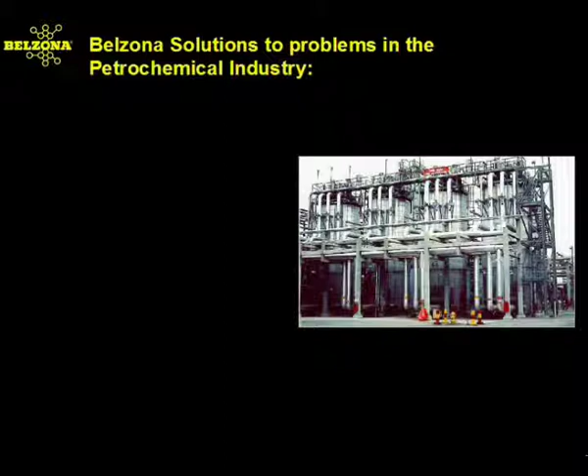Maintenance personnel and project planners must continually deal with preventative maintenance measures, spend capital and energy in the design of equipment, and generally preoccupy themselves with many of the problems which are endemic to most chemical facilities. Some of these problems are stress corrosion cracking, chemical attack, under-insulation corrosion, abrasion, crevice corrosion, galvanic corrosion, cavitation, and microbiological corrosion. Belzona's solutions are used throughout the world to solve and prevent many of these problems in a variety of ways.

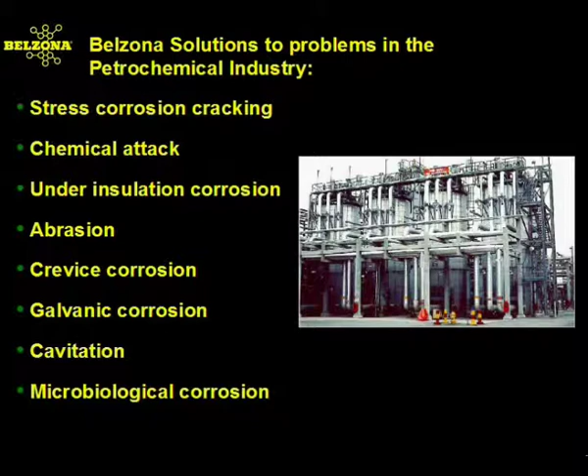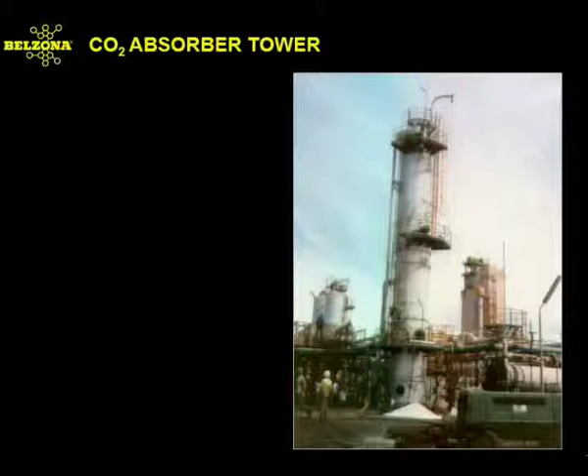Take for instance absorber towers. These units are found the world over to remove unwanted substances such as carbon dioxide, hydrogen sulfide, and sulfur dioxide from a process stream which would otherwise contaminate or inhibit a chemical process.

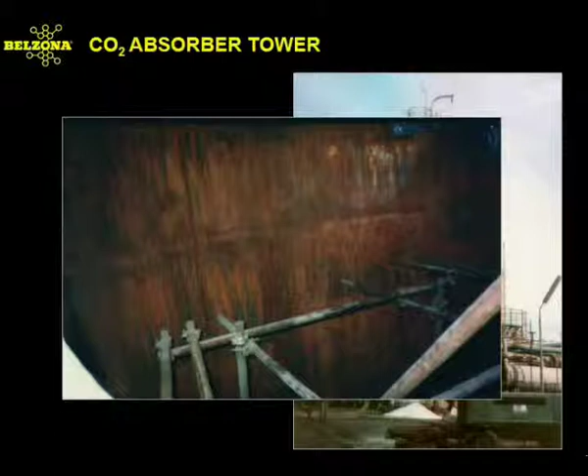Carbon dioxide absorber towers, such as the one pictured above, suffer from stress corrosion cracking. They are also susceptible to chemical degradation as a result of the side production of carbonic acid. Rebuilding and coating the walls of the tower with chemically resistant products will provide the necessary protection against acid or amine solutions.

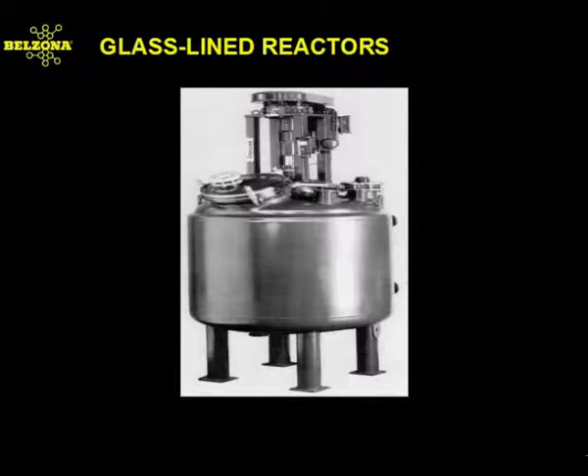A piece of equipment found in most chemical plants are glass-lined reactors or tanks. Most often, these tanks are utilized for their high temperature and good chemical resistance. However, when damaged or abused, they become tedious and expensive to repair and refurbish. Oftentimes, the repair options by the manufacturer are limiting and unrealistic.

For instance, the lid of this vessel had become damaged due to negligence on the part of the maintenance personnel of this pharmaceutical facility. Without any other recourse other than having to purchase another brand new lid, the local Belzona distributor was summoned. Utilizing a forming technique, the underside of the lid was repaired and placed back into service in a short period of time.

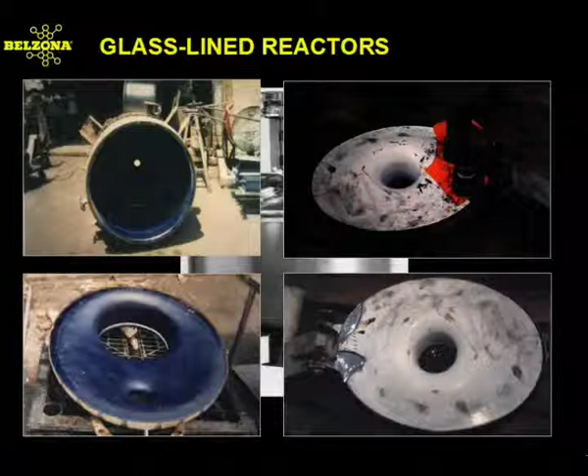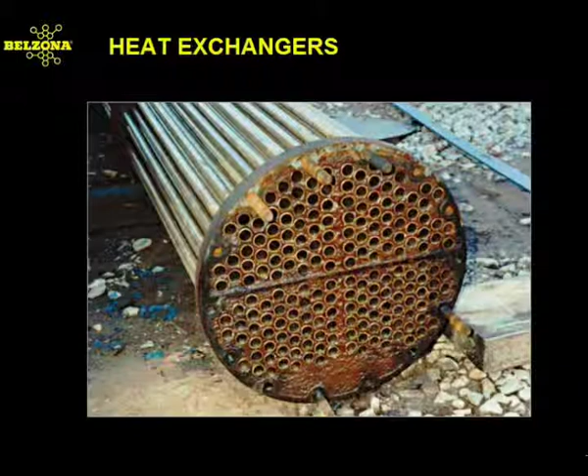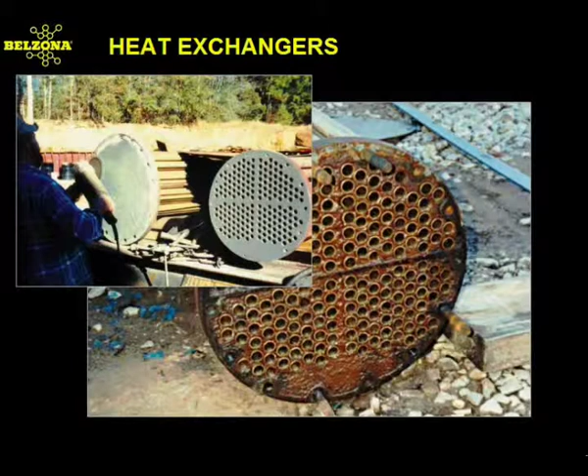Heat exchangers are found throughout any chemical facility, whether they are being used directly in a process, being used as condensers to reclaim water, or being used to cool a process fluid. They suffer from chemical attack, corrosion, and erosion. Belzona offers various systems depending on the chemical solutions, temperature, concentrations, and pressure to help stop and prevent such damage.

Belzona offers step-by-step solutions for the rebuilding and coating of heat exchanger tube sheet surfaces, end covers, floating heads, division bars, and channel heads.

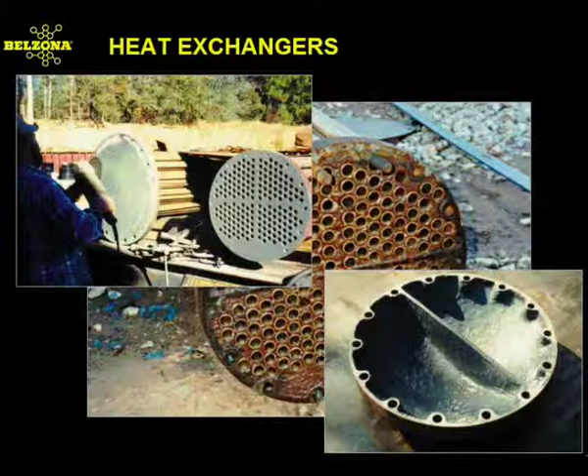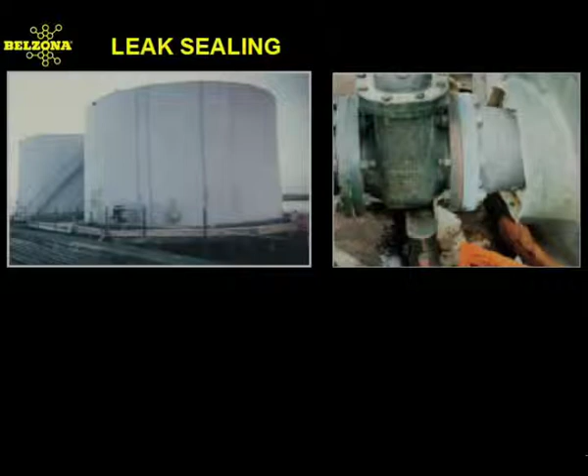Leaks and corrosion on the side of holding vessels, along pipes, near or on flange faces are a problem. Belzona offers various ways to provide emergency as well as long-standing solutions to many of these problems. The products can be used over a wide range of substrates including rubber, concrete, metal, and fiberglass. Their outstanding resistance against chemicals and high temperatures offer cost-effective and time-saving solutions.

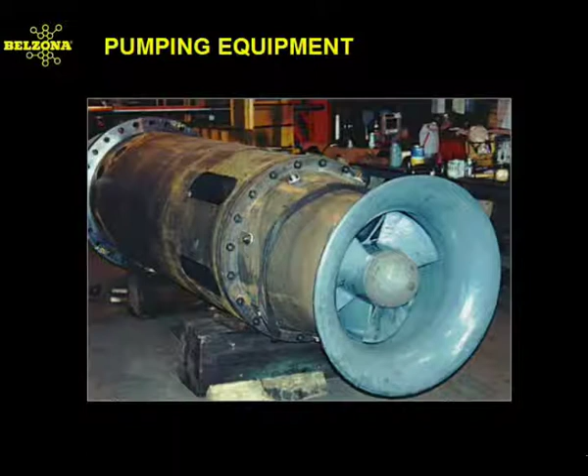Pumps serve a multitude of uses in a chemical facility for distribution, production, processing, and recycling. As can be expected, the various substances which flow through a pump can cause chemical attack and erosion corrosion. Belzona's fluid flow systems can be used for various purposes: to rebuild a worn wear ring seat, a cutwater, or the cone of a vacuum pump.

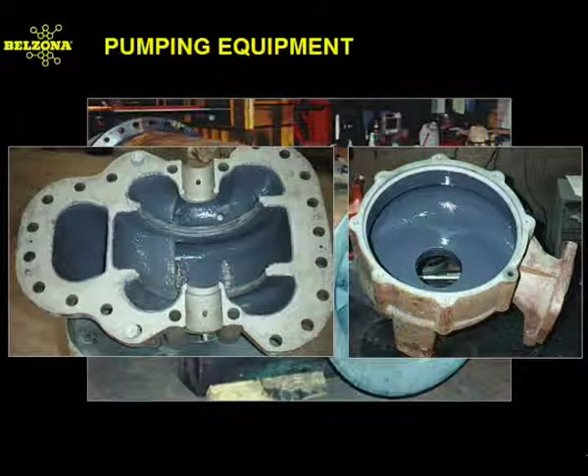They can also be used to coat impellers, rotors, end covers, and casings. The product's high chemical, erosion, and corrosion resistance provide versatile solutions to many recurring problems.

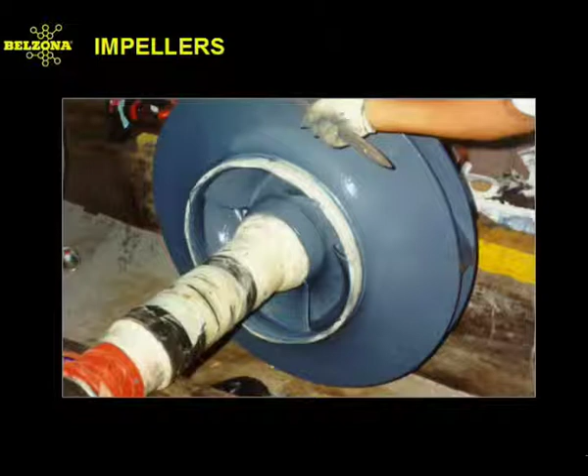Impellers are also prone to erosion corrosion and chemical attack. These impellers used in main circulating water pumps suffered from cavitation. Belzona offers rebuilding grade products to compensate for the erosion due to cavitation, thereby providing the needed protection as well as a means to slow down such damage.

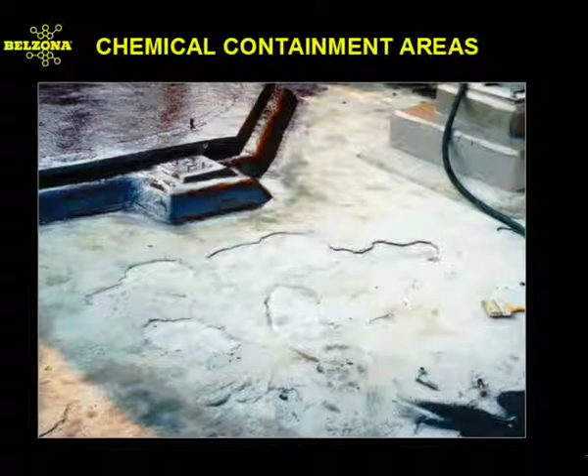Containment areas present a special problem. Ever-increasing concerns to make process facilities compliant with environmental regulations has led to greater efforts to comply with such legislation. Although a great building product due to its porosity and chemical makeup, concrete is easily attacked by various chemical solutions. The use of chemically resistant rebuilding and coating products increased their functionality remarkably.

Belzona offers tough, non-porous products resistant to a wide range of chemicals, such as high concentrations of inorganic acids, all types of hydrocarbons, caustic substances, organic acids, and alcohols.

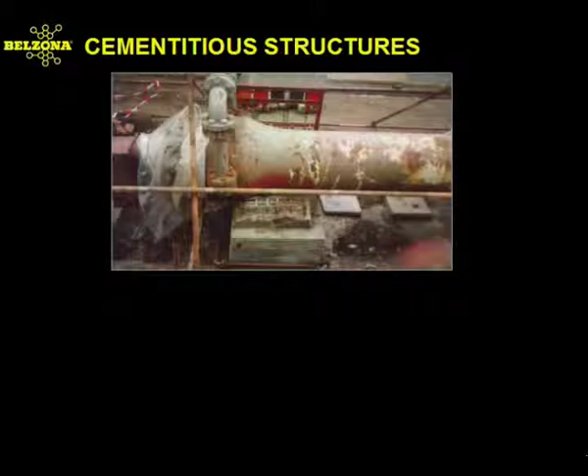Whether it be a support stand for a pump, circulating agitator arm, or reactor, as in this case, the Belzona 4000 series products can be used to rebuild and repair concrete structures. The product's high durability and resistance to vibration make them ideal to resist high loads of varying degrees of movement.

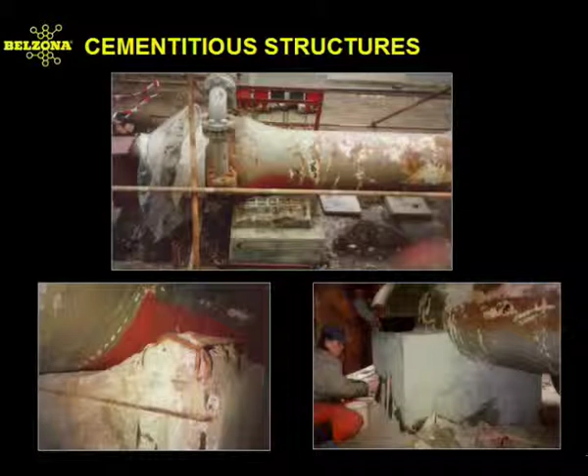As seen in this case, the complete deterioration of the base of this reactor is such that even the rebar is exposed. It is obviously critical to encapsulate the rebar and preserve the integrity of the base. The actual reconstruction of the base itself proved effective, saving the facility valuable downtime.

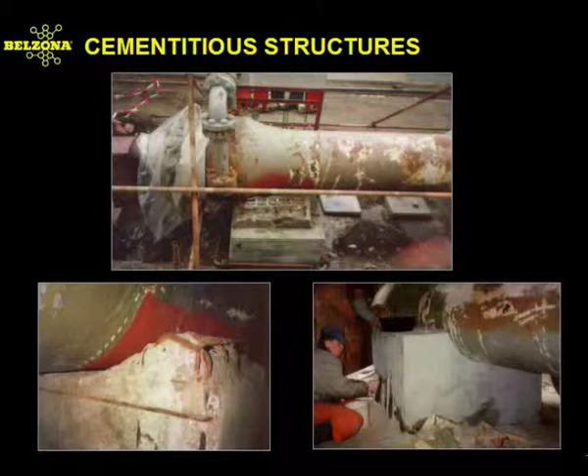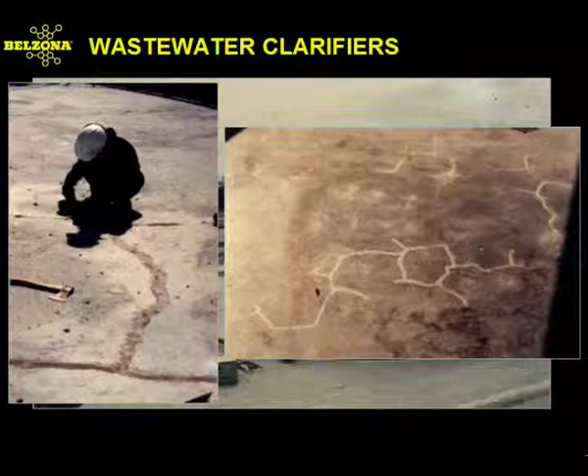The treatment of water used throughout the plant becomes a critical part of a chemical facility's processes. As the water goes through the various stages of purification, it comes in contact with pumping, piping, and equipment used for purification. There is an obvious interest in protecting this equipment to minimize costs and increase effectiveness.

This 100-foot diameter clarifier suffered from several problems. Of utmost importance, besides the obvious chemical problems, were the cracks throughout its base and the use of an inadequate elastomeric compound for the expansion joint. Belzona 2000, 4000, and 5000 series products were used to repair and coat this clarifier, proving once again their versatility.

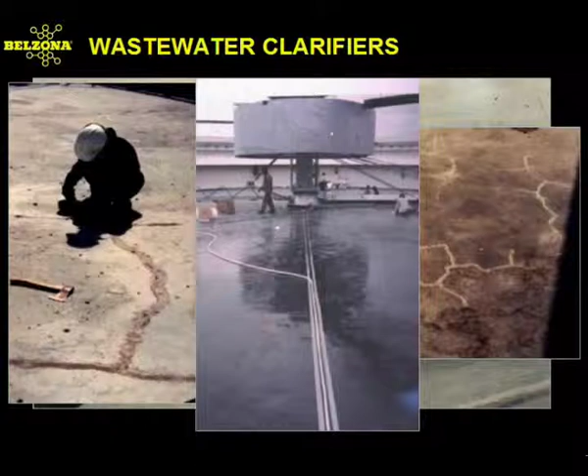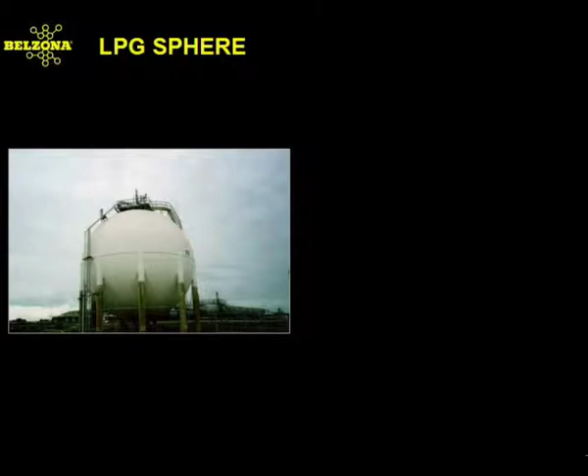A leak in this liquefied petroleum gas holding sphere presents a potentially disastrous hazard. As with most insulated structures, equipment, and piping, the improper protection of insulation can result in corrosion damage, inadequate production rates, and safety concerns. Stress corrosion cracking can result from the use of metal cladding to protect insulation.

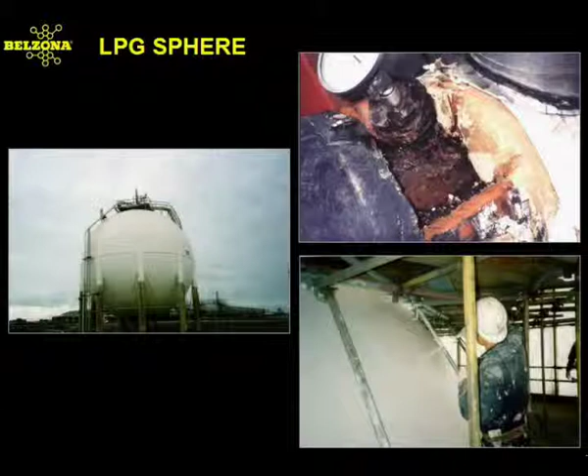Although it is generally impervious to water from the outside, it becomes doubly ineffective as it traps any moisture that may result on the insulation. The inability for the moisture to escape provides a medium from which corrosion can start to propagate. Belzona's unique insulation protection system waterproofs from the outside, but its microporous top surface allows for any water vapors to escape. This ensures that the insulation remains dry and puts a stop to the corrosion even before it starts.

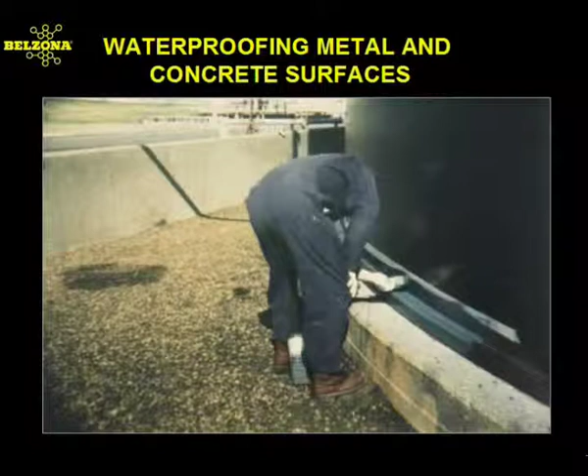A common problem encountered with process and holding tanks is corrosion along the chime angle of these metal structures. Moisture creeps up under and through the concrete, allowing the metal to corrode. The isolation of the concrete and metal from moisture can adequately eliminate such a problem. The Belzona 3000 series provides such a protection by offering a flexible, microporous membrane that is watertight and resistant to the effects of ultraviolet rays.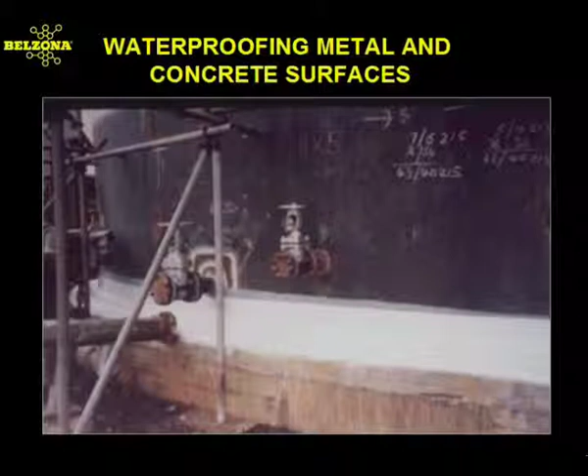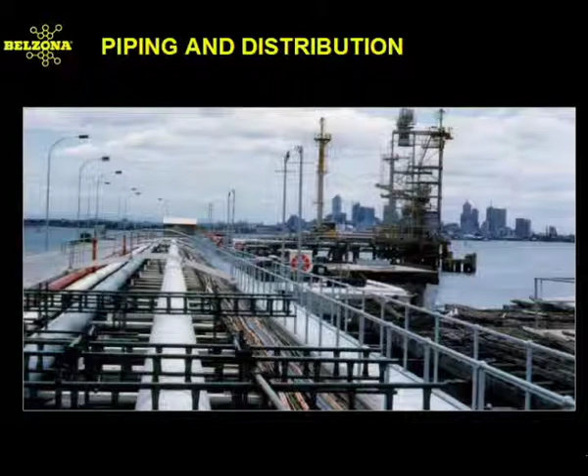Chemical plants are composed of miles upon miles of pipelines. Both the exterior and interior of pipes, most often than not, need to be coated and protected. Belzona offers systems of coating materials to line and coat pipes. It also offers materials to rebuild corroded areas.

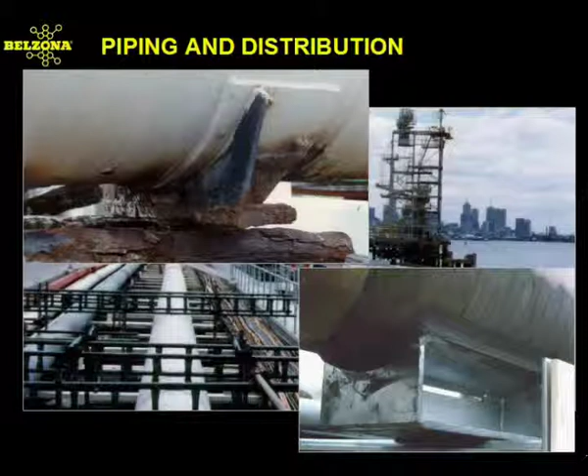The product's high adhesion to various substrates makes them ideal to bond sleeves and patch scratches or voids over a section of pipe. In this instance, the high level of corrosion on the pipe's support and wear pad has become so severe that it has extended over to the surface of the pipe. Belzona products can be utilized to rebuild the pipe support and bond wear pads.

Whether it be to refurbish a pump, valve, or heat exchanger, or to provide the solution to eliminate corrosion on pipelines and process tanks, Belzona has the techniques and products to provide the required solution.

People around the world are witness to the outstanding performance and adaptability of the Belzona products. Leading petrochemical and refinery facilities utilize Belzona to solve their most demanding problems. Why not consider how Belzona can help you?